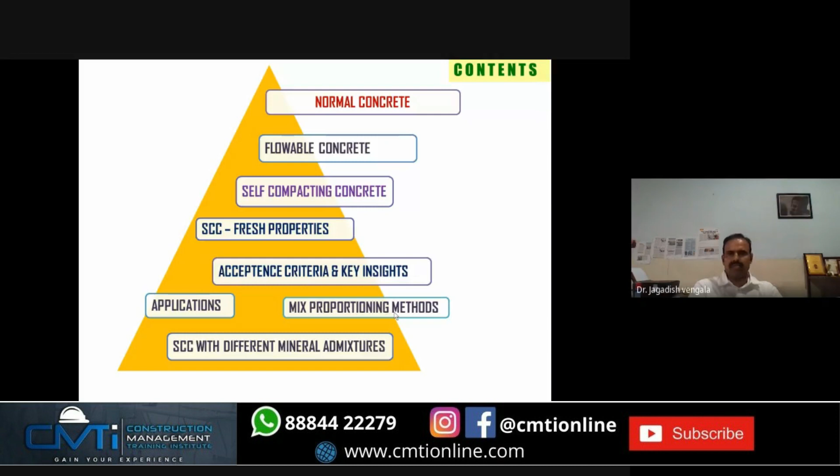My contents for this presentation are as follows. I'll give you a small brief about normal concrete, then how to achieve flowable concrete from normal, what is self-compacting concrete, the difference between flowable and self-compacting concrete, and why fresh properties of self-compacting concrete are important. I'll also cover how to accept this concrete, key insights in SCC, some applications, and one or two mix proportioning methods, along with how you can achieve it using different mineral admixtures. This is a brief content of my presentation.

Let me start my presentation with a small video which I came across near my house.

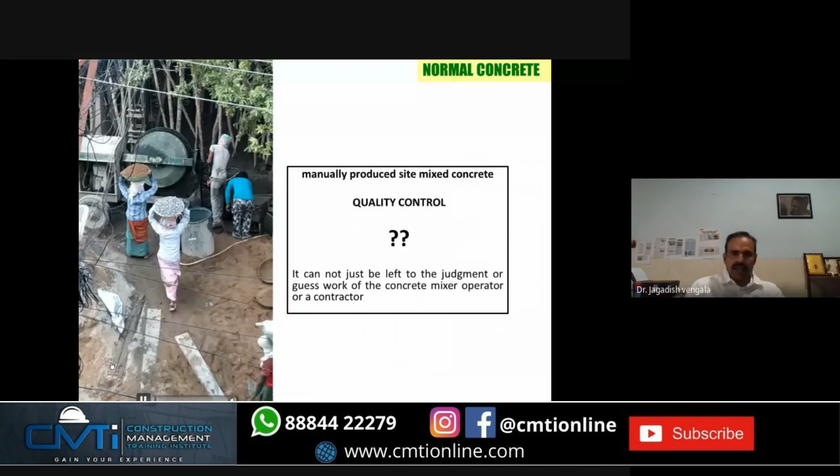This is how concrete is getting abused. Let me mute the video. So this is how the concrete is getting abused.

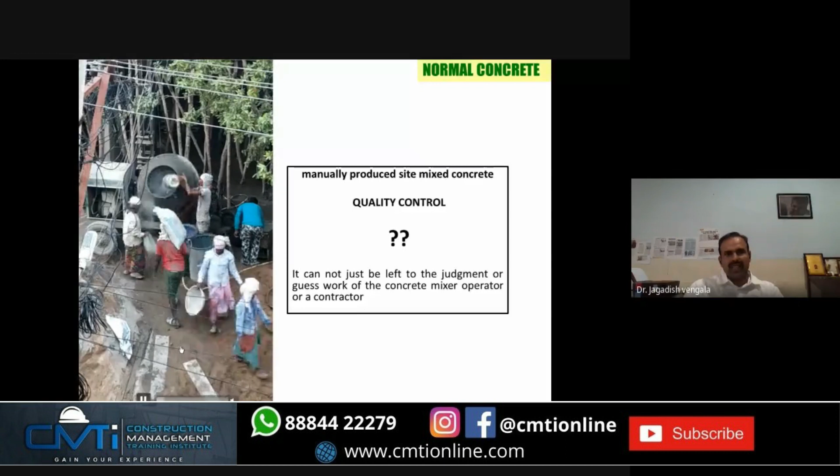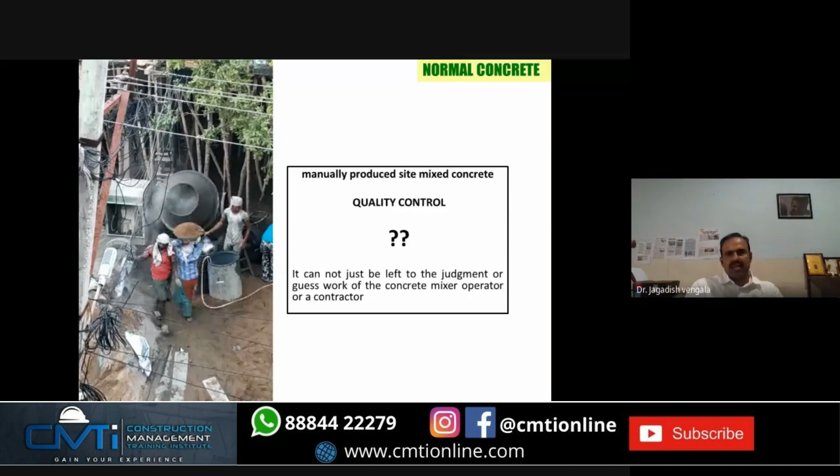This happens at most sites if you're not careful about the concrete. This is manually produced site mix concrete, and you can see there are a lot of problems.

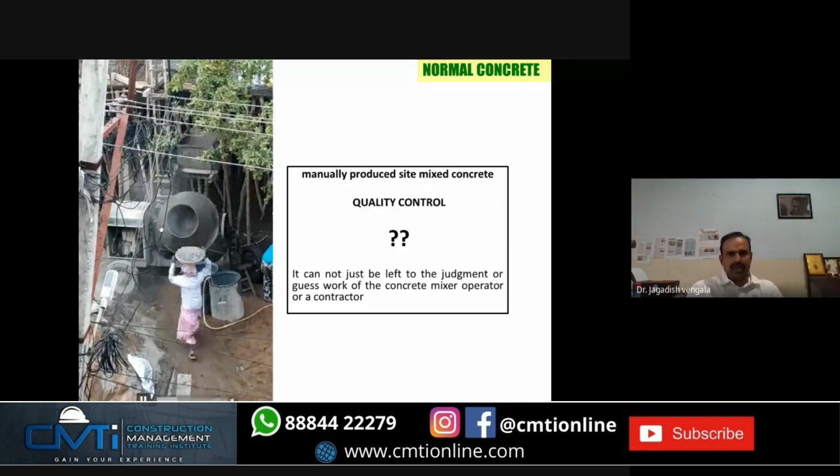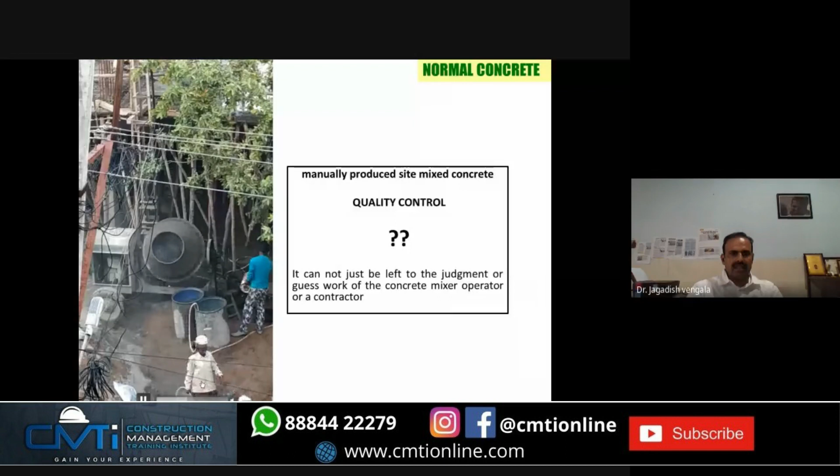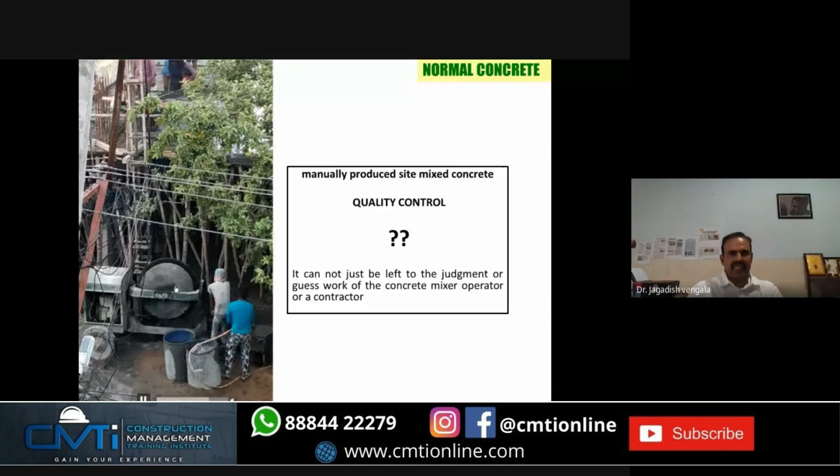What is the problem in this video? I'll explain. Here you can see the lady is putting coarse aggregate and sand, and just before dumping the concrete. Let me slide it over so you can see here - just now she has put the coarse aggregate and he has dumped the concrete. That means there was no proper mixing that happened.

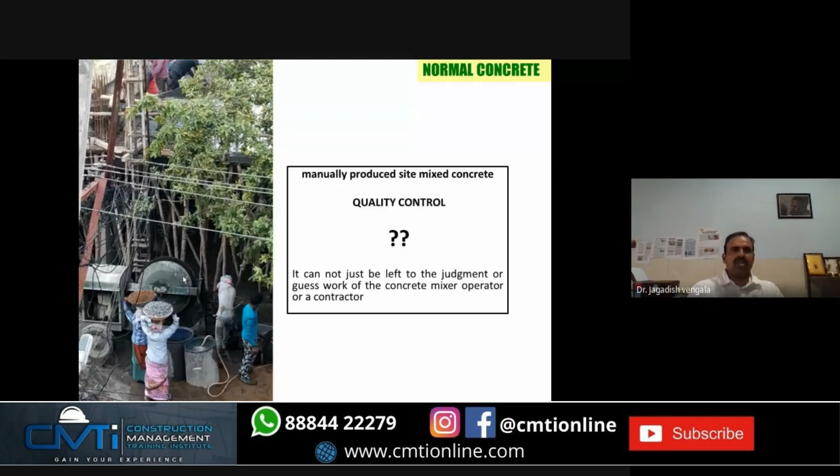So you cannot just leave this to the judgment or guesswork of an operator or contractor. This is the kind of manner in which concrete is getting used in many places, and it is very complicated to sense each and every variable - if it changes, the properties will be affected.

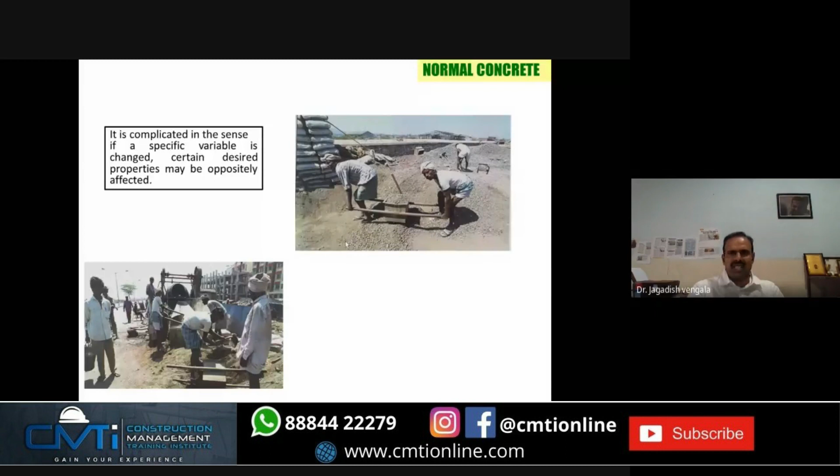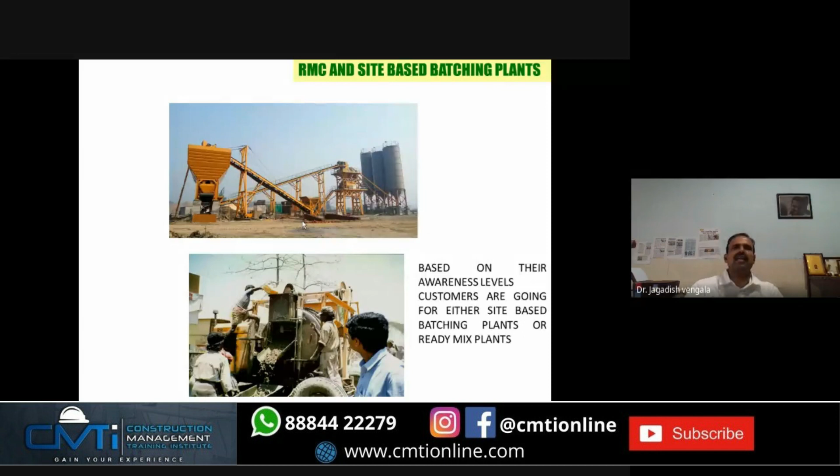On the roadside, a lot of construction happens, particularly on highways, with concrete laying and mixing. Depending on their awareness levels, customers, particularly for bigger projects, go for either site-based batching plants or ready mix plants.

This is a famous table in IS 456, which one has to know about. We'll concentrate on reinforced concrete. As per IS 456, the minimum cement content for reinforced concrete is 300 kg per cubic meter of concrete. So if you're making one cubic meter of concrete, the minimum cement content you have to maintain is 300 kg.

How do you design the mix? It is not based on grade, not based on water cement ratio, not based on cement - it is based on your exposure condition. This is very, very important. IS divides exposure conditions into 5 categories.

There is mild, moderate, severe, very severe, and extreme. Depending upon the type of exposure the structure is going to be built in, you design the concrete accordingly.

Say your structure is in a severe condition - you have to maintain a maximum water cement ratio of 0.45, minimum grade M30, and a minimum cement content of 320. So to start with, you design a mix keeping these parameters into consideration. Similarly, for extreme conditions, you have to go for M40.

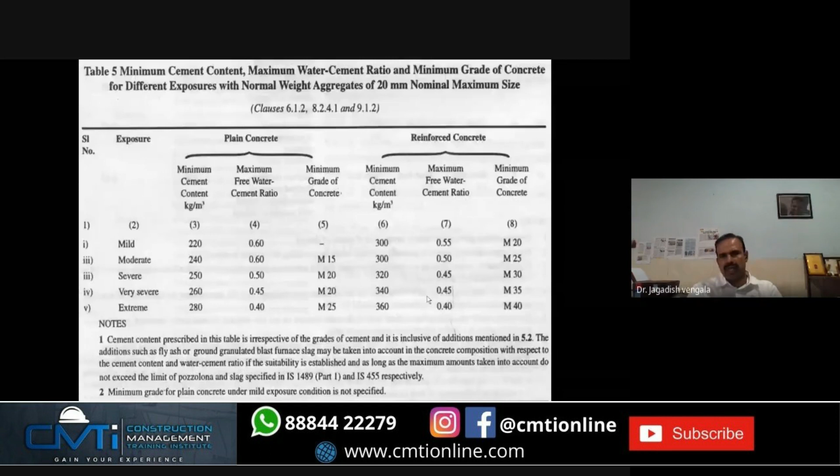IS permits a maximum cement content of 450 kg per cubic meter of concrete. Summing up, the cement used for normal concrete ranges between 300 to 450 kg. And you use a maximum of 0.55 water cement ratio, to maintain workability while minimizing voids, so you get reasonably dense concrete, with grade of concrete between M20 and M40.

IS permits the use of both mineral and chemical admixtures. The most widely used mineral admixtures are fly ash and GGBS, and for high strength concrete applications, silica fume and metakaolin, used in minimum quantities. For silica fume and metakaolin, we usually take between 5 to 15%. For fly ash, we can go up to 30-35%. For GGBS, one can even go up to 60%.

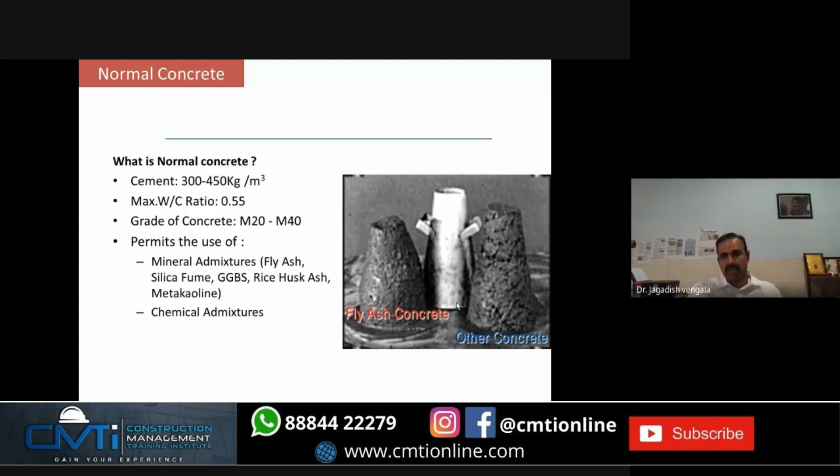Anyway, I'll show the percentages about IS permits.

So you make a normal concrete. Suppose you keep on adding more water to a particular mix, can you achieve a flowing concrete? Yes, it flows. But once you keep on adding the water, what happens? There are two problems: one is segregation, and another is bleeding, because you don't have enough finer content to hold the water. So by adding water, you may not get a flowing concrete that is also good workable concrete without segregation and bleeding.

And in the hardened state, what happens if you keep on adding the water? It leads to durability problems because the water gets evaporated and leaves air pockets, and the strength and other problems occur.

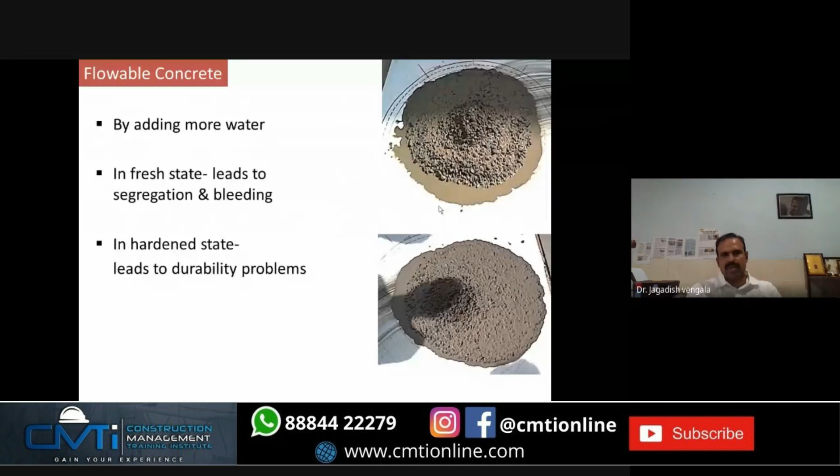So just to give you the difference between segregation and bleeding: segregation is the separating out of all the constituents in the concrete, which results in a non-uniform mix, meaning the water cannot be held by all the other constituents. Bleeding is generally a result of aggregate settlement, where the mixed cement water releases the excess water, which forms on the top or sometimes bleeds out. So these are the problems you get if you just add water to achieve flowable concrete.

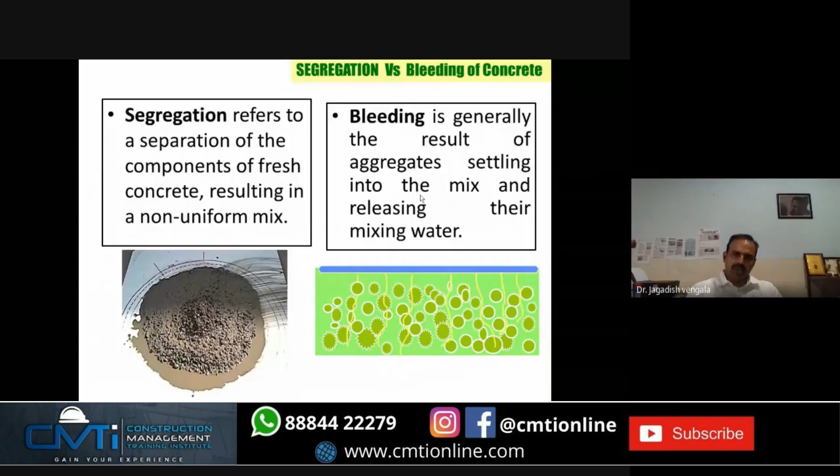But anyway, you can achieve flowing concrete by addition of chemical admixtures and by adding mineral admixtures to get a homogeneous mix. Now coming to self-compacting concrete, the difference.

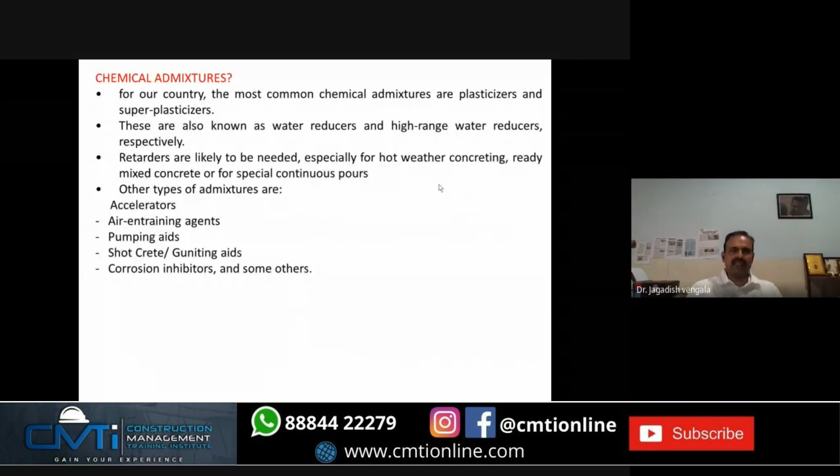Before explaining self-compacting concrete, I'll give you an overview of the importance of chemical admixtures. For our country, the most common admixtures we use are plasticizers and superplasticizers. Plasticizers are usually water reducers, and superplasticizer, the name itself, means high range water reducer. We also use retarders, accelerators, and air entraining agents, which purposefully create air bubbles inside the concrete to accommodate freeze and thaw situations. For shotcreting and guniting, you add chemicals to hold the paste onto the reinforcement. All these we call chemical admixtures - not just superplasticizers or plasticizers, but retarders, accelerators, everything comes under chemical admixtures.

I'll give you the concept of what a chemical admixture, particularly plasticizer, does. When you add water to cement, cement naturally flocculates, meaning all the particles come together and form a lump kind of thing. In these lumps or flocks, mixed water gets trapped within the flock. So if you burst the flock, what happens? The water inside will come out.

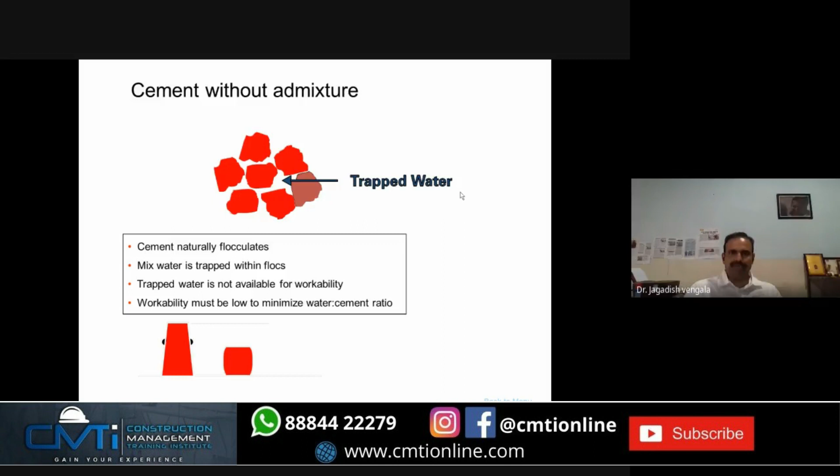This trapped water is generally not available for workability, so you have to add some kind of admixture to release this trapped water so that workability increases. By adding a plasticizing admixture to the mix, the entrapped water gets released and cement particles move freely. Workability increases, and when you have more water available for hydration, your hydration products also get improved.

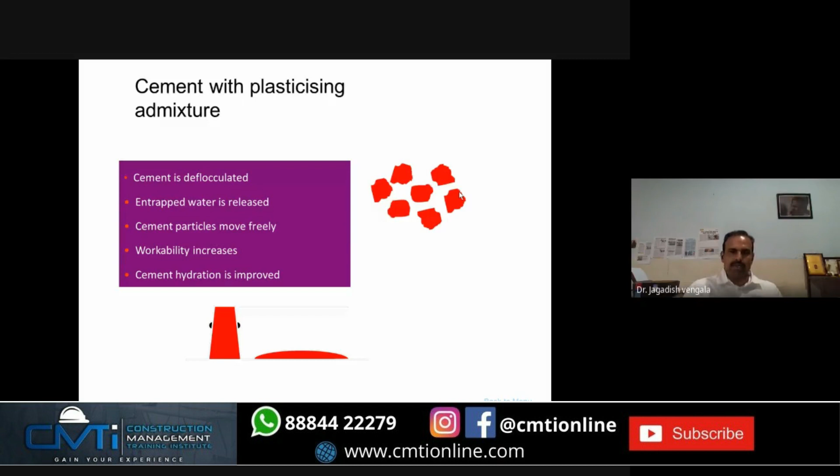This is another picture. Just to mention once again, when you add water to the mix, the cement flocks will form. When you add the chemical admixture, it releases the trapped water and it becomes more workable.

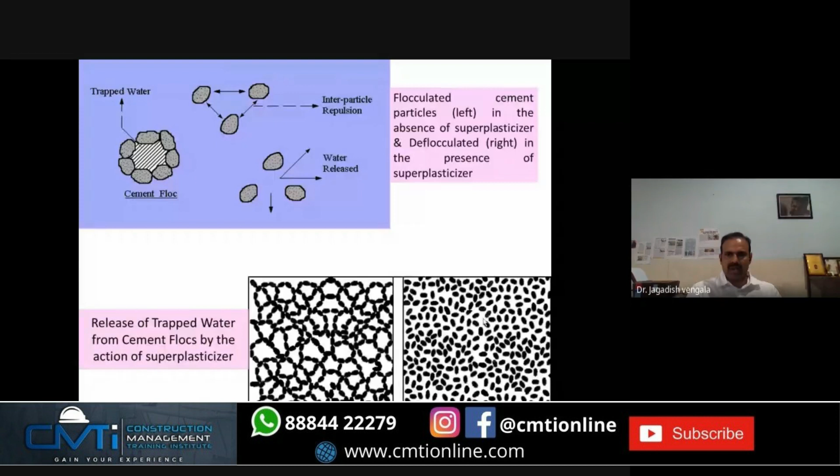So what does a normal plasticizer do? It creates different charges in the particles. When cement particles have the same charge and it releases, there is a repulsion that happens. So the chemical admixture creates an interparticle repulsion, and thus the trapped water gets released. You can see the picture on the bottom left - this is unflocculated, this is flocculated, and after adding the admixture, this is how the cement particles look. It's a microscopic representation.

What this chemical admixture does, by adding plasticizer, is achieve two things: we can increase the workability, and at the same time increase the strength. How do we do that? Let us take an example.

A mix with 0.55 water cement ratio gives a slump of 75 mm. It's a normal concrete giving a strength of 51 MPa. When you add the plasticizer, without increasing the water cement ratio, it will increase the slump while achieving the same strength - 51, 50, it doesn't make any difference. So in the first case, by adding superplasticizer, you get a more workable mix, meaning the slump is increased. In the third case, you are actually reducing the water cement ratio and adding superplasticizer while maintaining the same slump.

The first case slump and the third case slump are the same, but by adding water-reducing admixture or superplasticizer, you are reducing the water cement ratio. Thus, you get more strength. You know Abrams' law relating water to cement ratio to strength: when water cement ratio increases, strength decreases. You are reducing the water cement ratio and increasing strength by adding superplasticizer while maintaining workability.

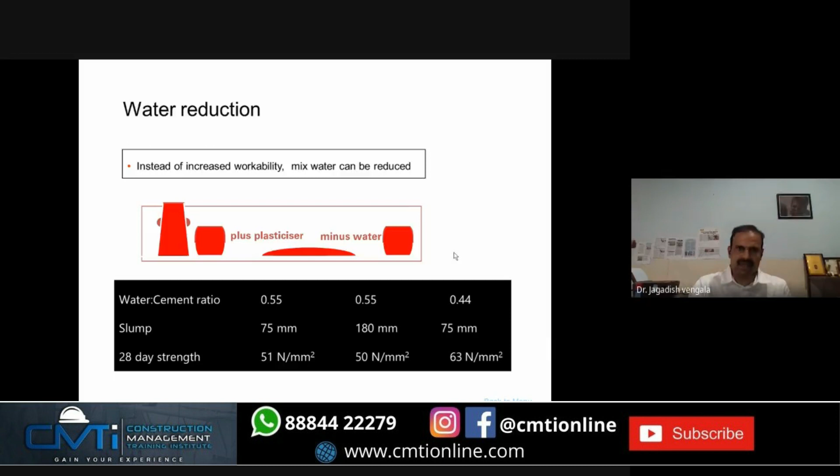So this is what a typical chemical admixture, plasticizer, or superplasticizer does. But when you look into complex structures, nowadays with mechanization, more complex structures like G plus 10, G plus 20, and 110 stories are coming up. So when designing, you have complex reinforcement. Here I would like to give you one example.

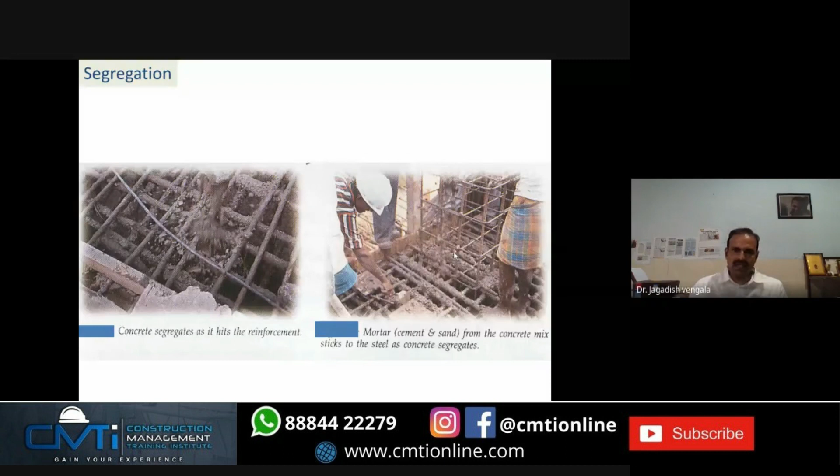You cannot place concrete from beyond a particular height. We call it 1.5 meters free fall - you cannot throw or place concrete beyond 1.5 meters height. What happens is, particularly with congested reinforcement, when you place concrete at a height, it hits the reinforcement and segregates. Mortar sticks to the reinforcement and coarse aggregate goes down if your mix is segregated or bled, if your mix is not good. These are the problems that happen particularly in complex reinforcement situations.

As I mentioned, flowable concrete - as I showed, you cannot get it by just adding water. To get a homogeneous mix, you have to incorporate more fines. Suppose if you have 100 particles and you add water, there is excess water available. If you add another 50 particles, these 50 particles will accommodate the excess water to get coated around it. So incorporating fines will reduce bleeding or segregation, and it will enhance the cohesion of the mix, and flow enhancement can happen.

But when you add excess fines, what happens? It sticks, becomes more cohesive - again the problem of placing. So you have to see what should be the workability of your particular mix.

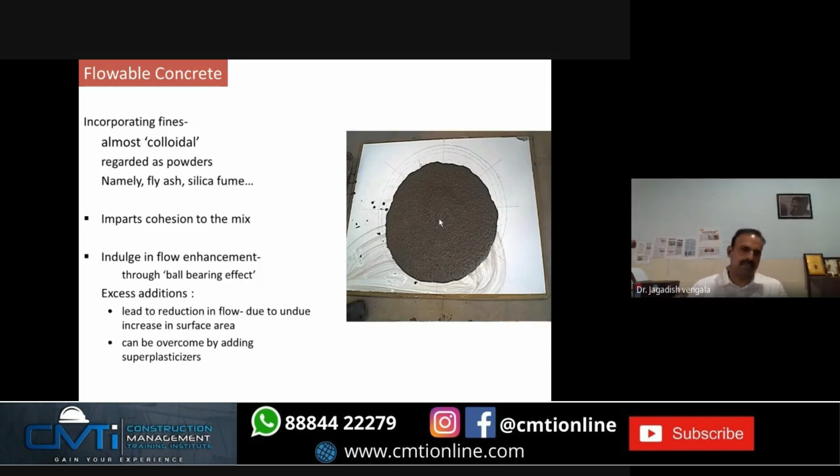As I mentioned already, RMC and concrete pumping have advanced the methods of placing concrete, but problems of compaction still remain at most sites. In the current Indian scenario, there's a lot of construction of large, complex structures, particularly in fast track mode, coming up. So congested structural reinforcement makes vibration a problem.

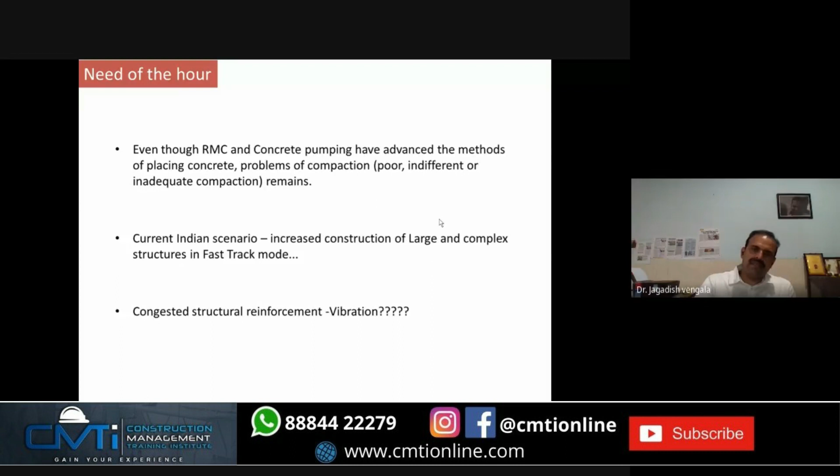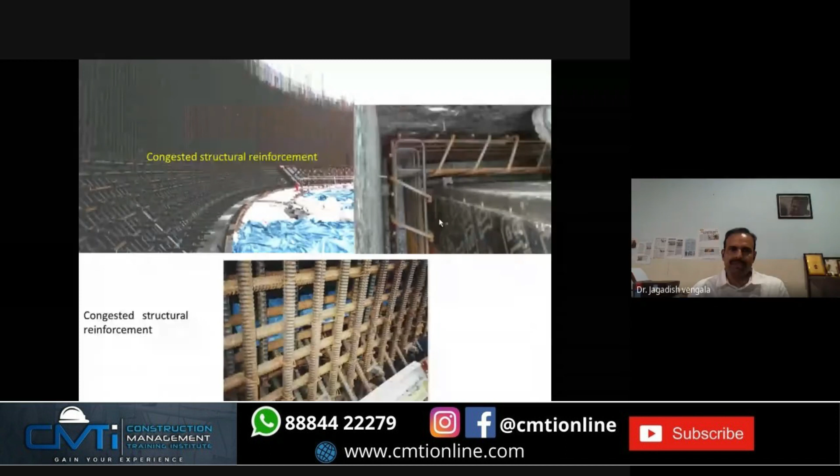But in case of congested structural reinforcement, there are a lot of problems - even though you try to vibrate it, sometimes you cannot vibrate it in such situations. So in these situations, self-compacting concrete is one such solution.

What is it? It is a highly flowable concrete. It flows, and even as it flows, it remains stable at every place. It can spread readily into nooks and corners of the formwork. You have a bigger slab with formwork - if you pour SCC from one side, it flows and reaches the other corner with the same homogeneity, same stability, and fills the formwork.

You need not do any consolidation, you don't do any vibration. At the same time, it will not undergo any kind of separation - that means when it flows, the concrete will not get separated out.

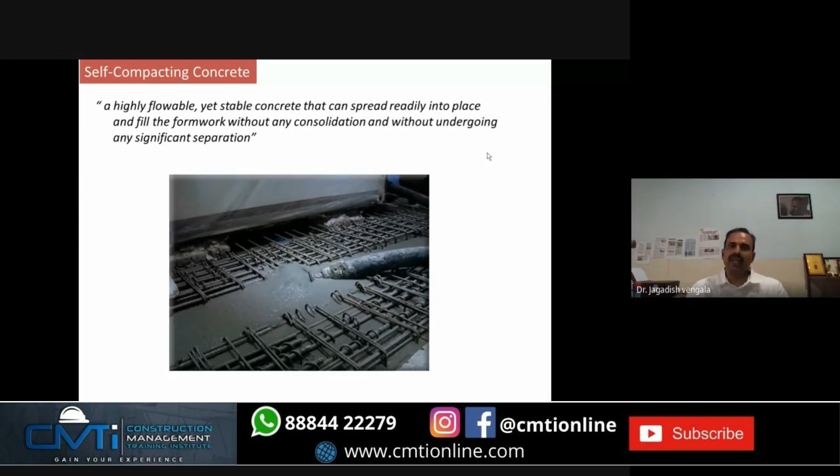What does that mean? Suppose it is flowing, there is a beam, because in this bigger slab you have beam reinforcement in between. If beam reinforcement comes in between, it has to pass through the beam reinforcement. The aggregate should not - suppose what happens if your mix is not good, all the aggregates get stopped at this reinforcement and only mortar goes to the other side. What I mean to say is, if it is good SCC, a flowable, stable concrete, it can readily place into and fill the formwork without doing any consolidation and without undergoing any significant separation.

So where did it start? Late 80s, 90s in Japanese construction and concrete industry. And the motivation behind SCC is that in the Japanese construction industry, there was a gradual reduction of skilled workers during that time.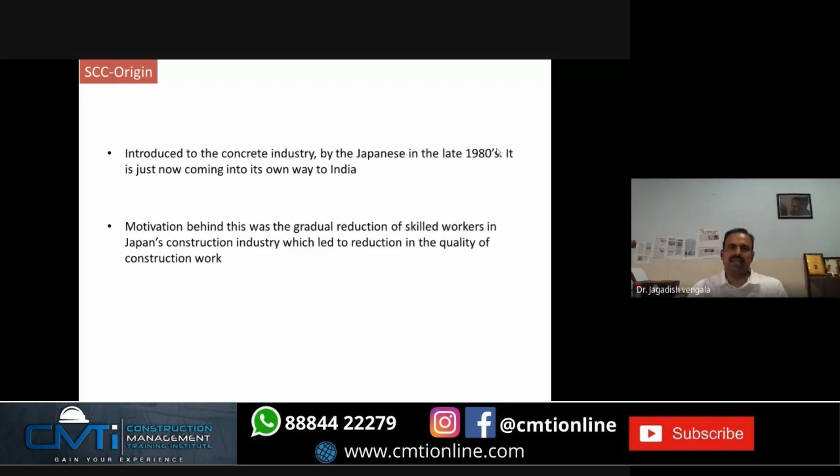Because of the reduction of skilled workers, the reduction of quality of construction took place, particularly the concrete work. This is the origin to come out with the SCC.

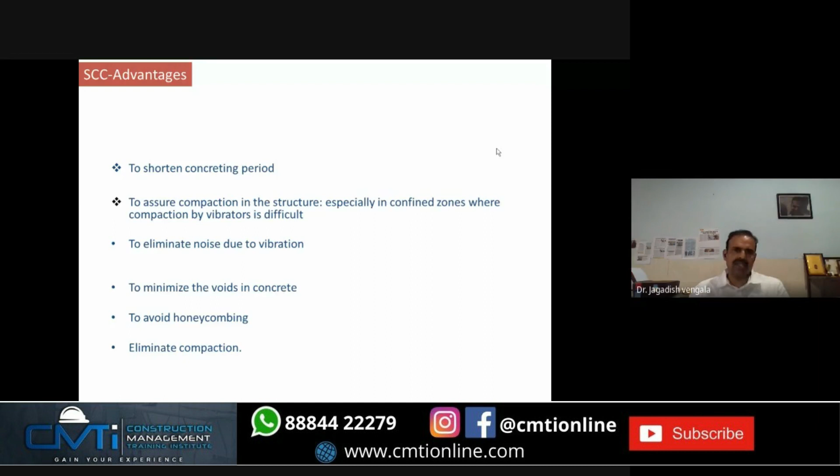There are a lot of advantages. It shortens the concreting period. It eliminates the noise due to vibration, minimizes the voids, avoids the honeycombing, and eliminates the compaction.

Let us see some of the characteristics of self-compacting concrete compared with normal concrete. In normal concrete, the cementitious content varies between 300 to 450, as we've seen in the previous slide. In case of self-compacting concrete, the minimum cementitious or powder content starts at 450 and ranges between 450 to 600 kg per cubic meter of concrete. In normal concrete, it's 300 to 450.

In case of normal concrete, if you take a typical mix, I cannot generalize because all our mixes are design mixes followed at the site. Say if you take a typical M20 grade of concrete, the coarse aggregate is approximately 1100 to 1200 depending on the mix, and fine aggregate is around 700 to 800 kgs. But in case of self-compacting concrete, you have a lower or equal coarse to fine aggregate ratio. In the last case I mentioned, 1100 plus 800, around 1900 kgs of aggregate is there in a concrete out of 2400 kg total.

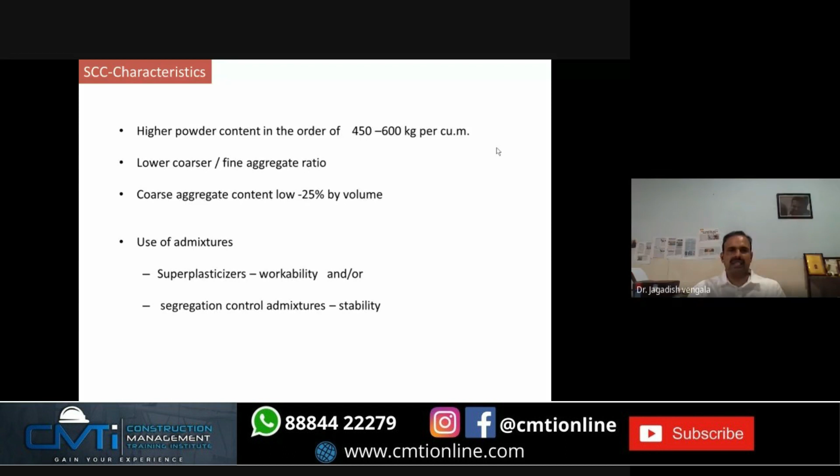In case of SCC, the ratio is equal. Out of 1900, 850 is fine aggregate, 850 is coarse aggregate, something like that. So either equal, or sometimes 700 is coarse aggregate and 750 is fine aggregate. That is how the mix becomes self-compacting, with total volume 25% by the coarse aggregate content by volume. And you have to use both stability and workability admixtures.

As I mentioned, powders are crucial. You need more powder content, more paste content in self-compacting concrete compared to normal concrete. To maintain the homogeneity, and to maintain the coarse aggregate in suspension, and to transport the coarse aggregate from one point where it's poured to the other point, it should have a rich mortar. This cohesiveness you can achieve due to large powder content, what you are adding, that means between 450 to 600 kgs.

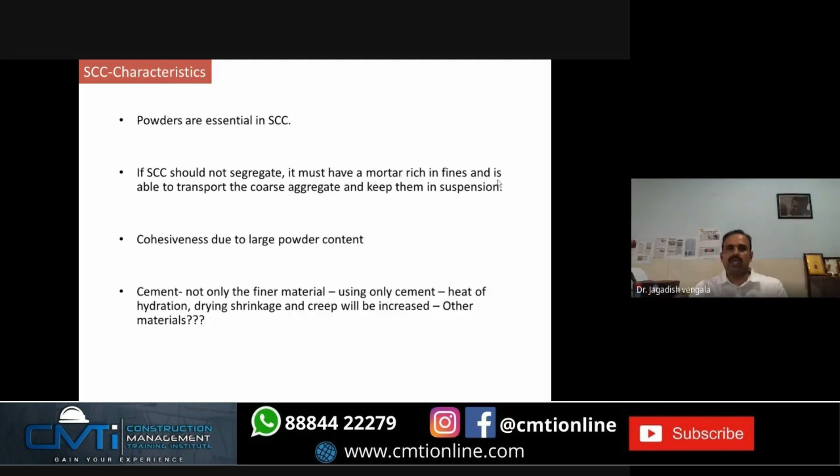When you look into IS 456, the cement restriction is 450 kg per cubic meter. If you're using only cement, you end up with heat of hydration, drying shrinkage, and other problems. So what are the various other materials? We have to look for other alternatives. Which are the other materials? These are what we call supplementary cementitious materials.

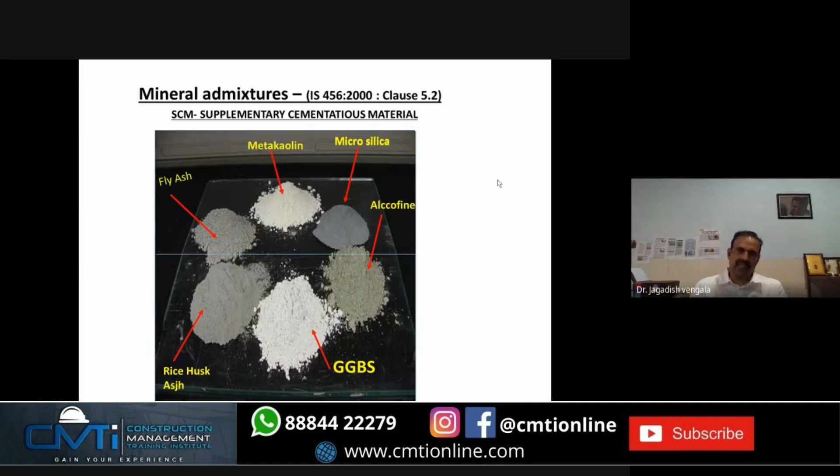So you have fly ash, majorly we are using GGBS, metakaolin, microsilica, alccofine, silica fume. IS 456 permits these as per clause 5.2. What exactly is the reaction that happens by adding these supplementary cementitious materials?

When you add water to the cement, ordinary Portland cement, we all know the hydration process happens. The final end product is what we call calcium silicate hydrates. After the reaction, slowly it happens and the CSH gels keep forming. Along with that, there is excess calcium hydroxide lime present in the mix.

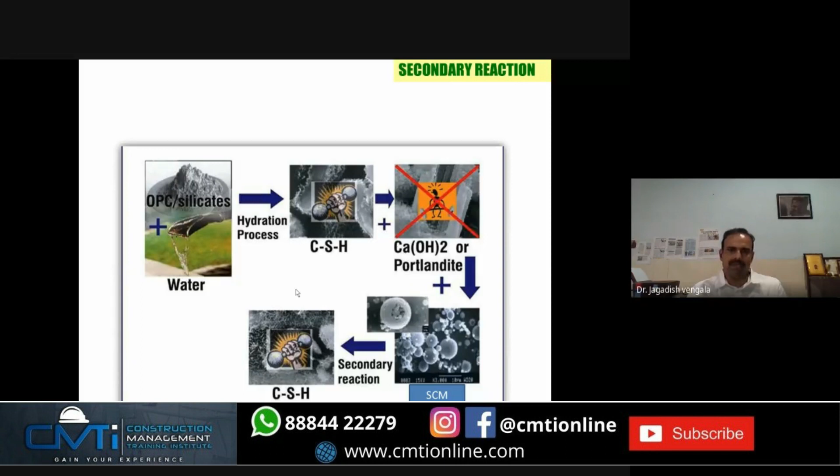When you add the supplementary cementitious material, either fly ash, GGBS, metakaolin or silica fume, these materials react with whatever excess lime is there and further react. That means what we call a secondary reaction happens and forms further calcium silicate hydrates, CSH gels, which is the main part of the concrete, which gives the strength to the concrete. So by adding supplementary cementitious materials in a mix, instead of 100 CSH gels, you get 120 CSH gels formed. That means more gels will form, so the concrete is more dense, you get more strength, more durability. Strength and durability are different, but when you have more gels forming, the concrete is more durable.

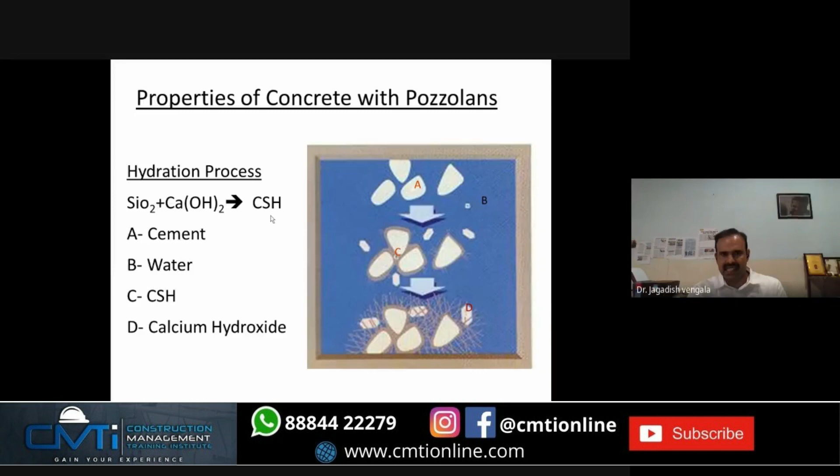Anyway, this is the hydration process - silica, calcium hydroxide, CSH gel, it forms. Also, by adding pozzolan, it will increase strength, and also increase impermeability.

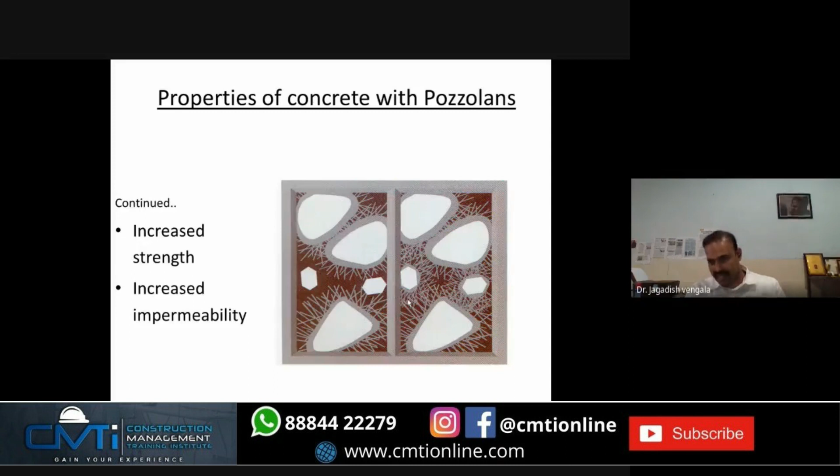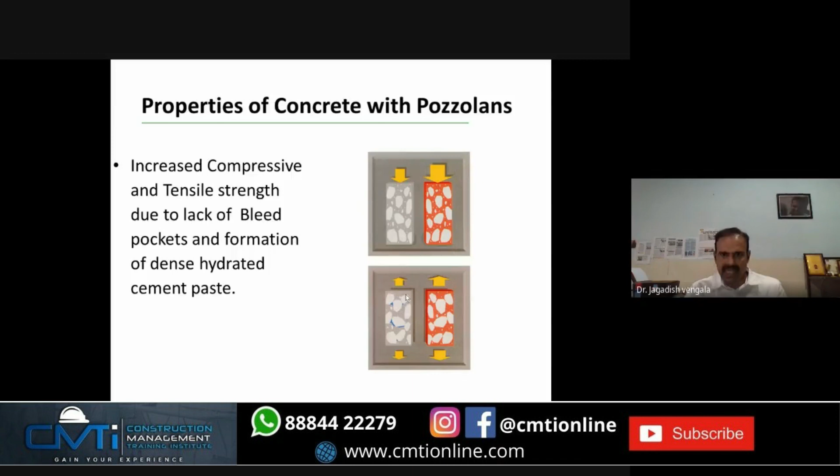In the first case and second case, you can see the pictures - the yellow color represents voids. In the second picture, which contains pozzolan, there is less void, shown in gray color. Also, by adding pozzolans, the bleed pockets get reduced and you get a dense hydrated paste, which by testing, gives increased compressive and tensile strength.

Coming to another important part of my presentation, that is fresh properties, very very important. In general normal concrete, what we do is make the mix and then place it in a slump cone, Abrams cone, lift it, check the vertical slump, or sometimes do the VB meter test, or other tests - very few tests, but the most common is the slump cone.

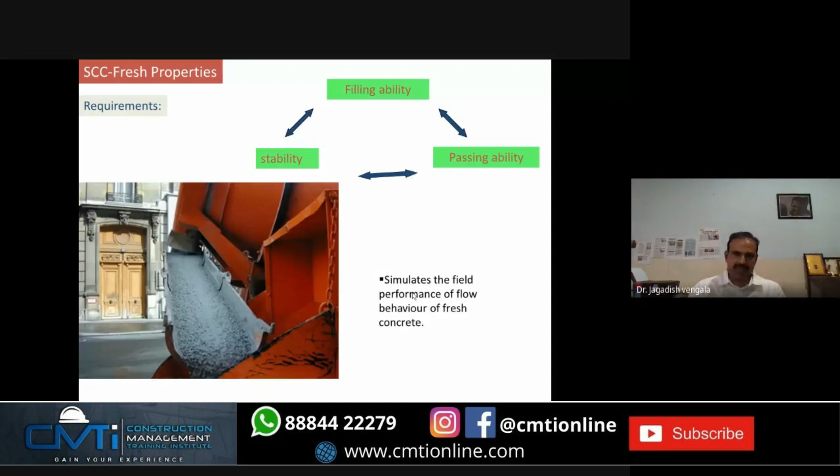In SCC, to know its stability, its filling ability, and passing ability, because you are placing it, it has to fill the formwork at the same time, it has to pass through the reinforcement at the same time, it has to have homogeneity throughout its movement. So you need to test the fresh properties thoroughly. You have to simulate the field performance. So these are the three properties you have to test.

One is the ability to flow into and fill completely all spaces within the formwork. Particularly, it has to go on its own weight, that means under gravity.

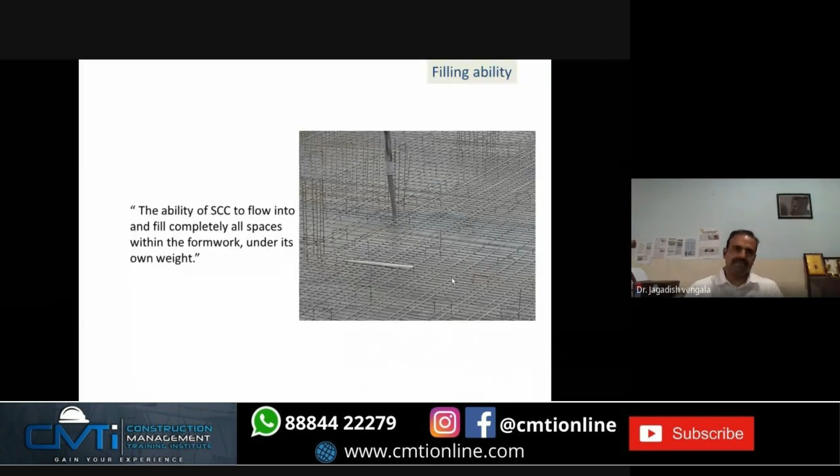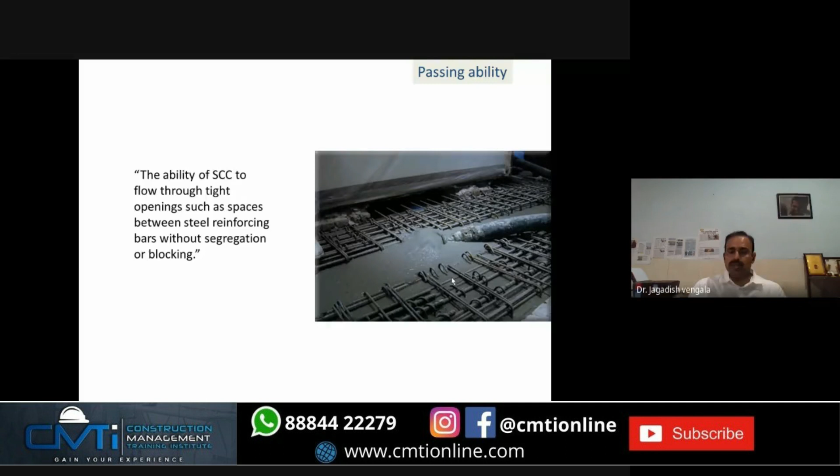Passing ability is, while passing through reinforcement between steel reinforcing bars, it should not get blocked, it should not get segregated. That is the property of SCC. And the last thing is segregation resistance. Throughout the placing and transport, it should remain homogeneous. You have to check this property also. So these are the three properties, very, very important.

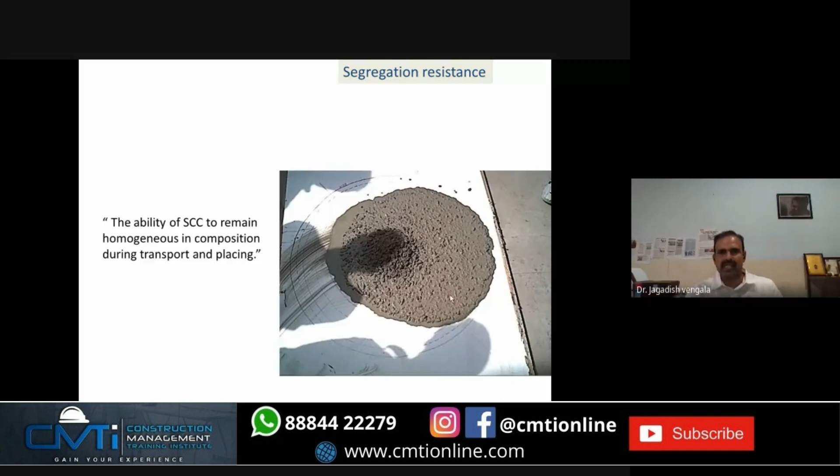Some of the test methods, so how do you check all these three properties? I'll explain you one by one quickly: slump flow, J-ring, V-funnel, L-box, U-box, fill box, and GTM screen stability test. These are the tests which will give you the properties of passing, filling, and segregation resistance.

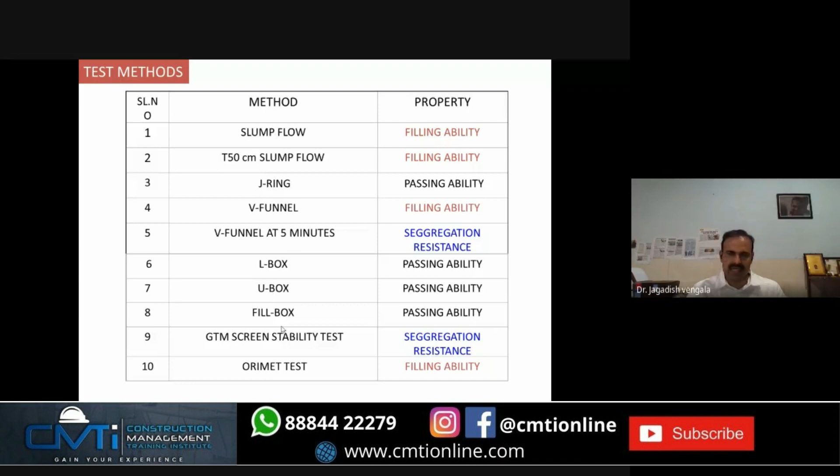Start with slump flow. We know the regular up-down cone, 300 height, 100 and 200 top and bottom diameter. It's the most popular method. We generally measure for normal concrete the vertical slump, but in case of SCC, you measure the horizontal slump, which measures the filling ability. When you place the concrete and lift the slump cone, it spreads, and you measure the horizontal flow. Generally it is between 500 to 800 mm, the recommended values.

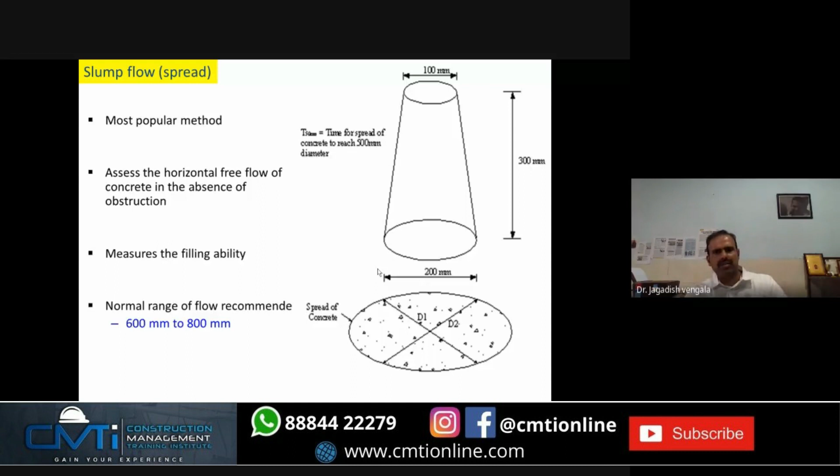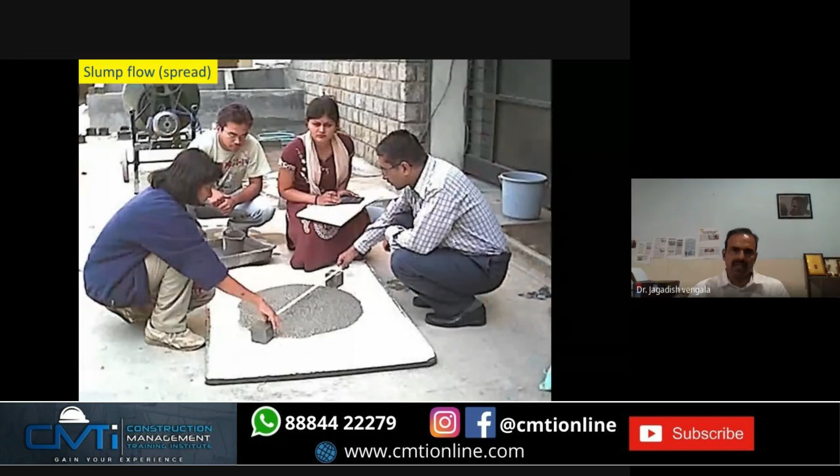This is how you pour the concrete in the slump cone, lift the cone, it spreads, and then you measure the horizontal spread. This is how you will measure it.

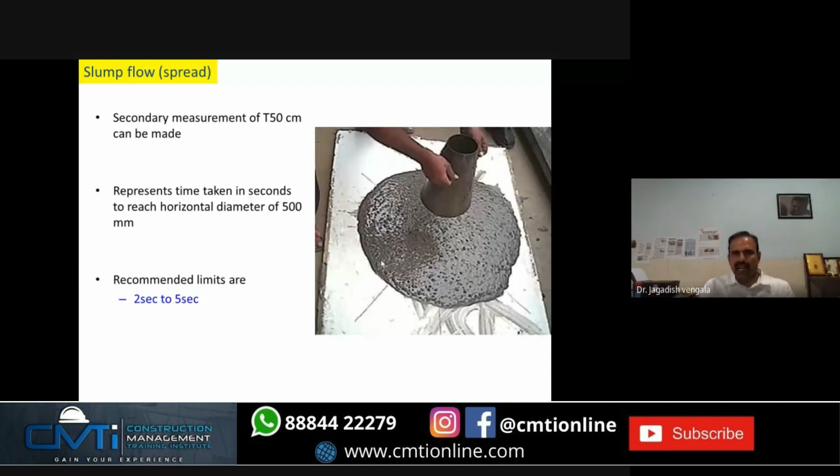And there is also one more measurement, what we call the T50 centimeter measure. What does that mean? When you place the concrete in the slump cone and lift it, the concrete will flow. The time taken to reach the 50 centimeter circle or 500 mm spread, you measure that, and it should generally be between 2 to 5 seconds.

Let us watch a video.

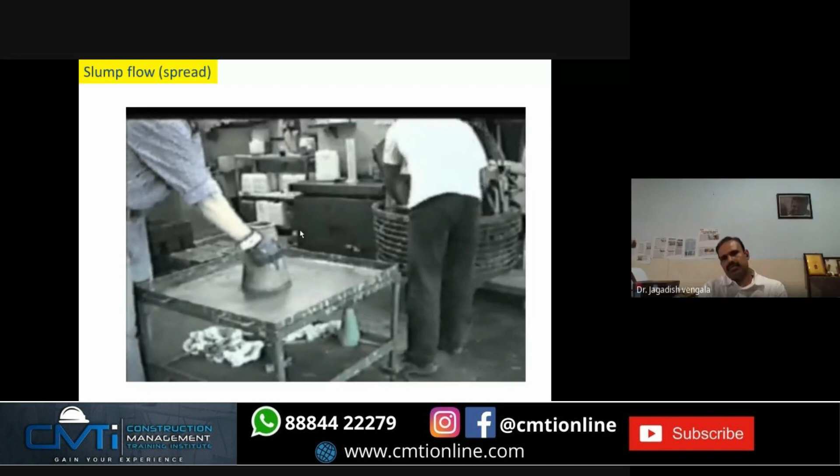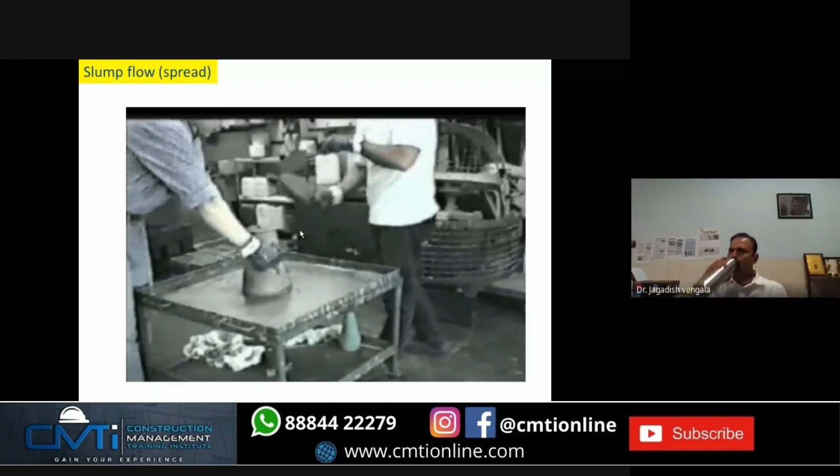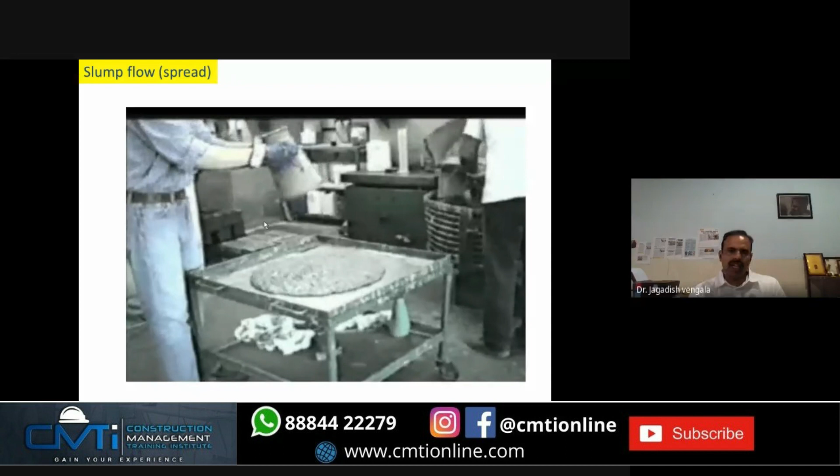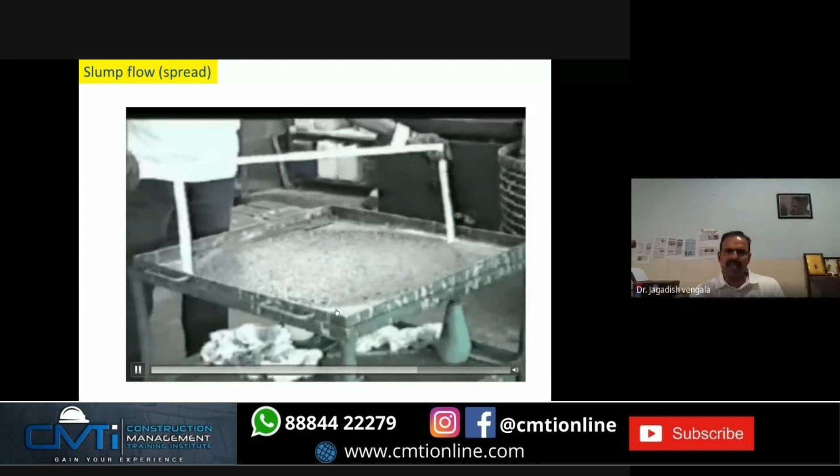So he placed the self-compacting concrete in the slump cone, cleared all that, and lifted it. Since it is not like normal concrete, it spreads. So what do you have to take? You have to take the average of two measurements in the orthogonal direction, and you take the average reading as the slump flow.

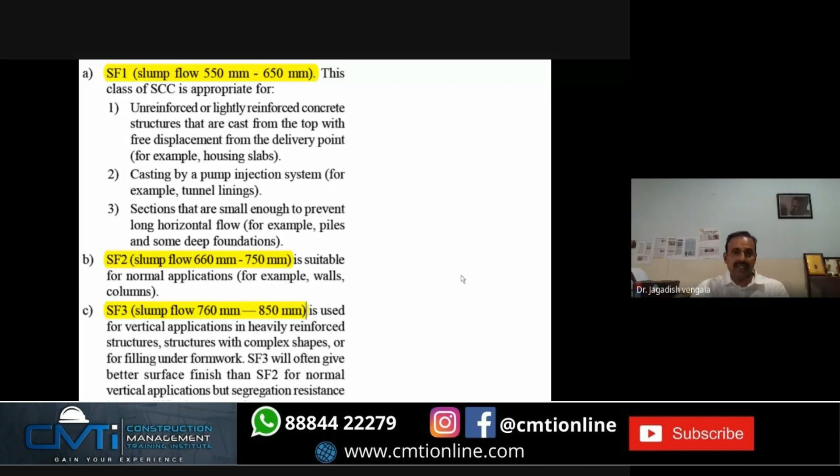Coming to the code book, if you look into the new IS 10262, there is a mention about self-compacting concrete, released in 2019. You can see the slump flow values of self-compacting concrete. The Indian Standard Code divides them into three categories: SF1, SF2, SF3. Flow between 550 to 650 is appropriate for unreinforced or lightly reinforced structures, tunnel linings and other jobs. Slump flow more like 660 to 750 is suitable for walls, columns, and other things, and 760 up to 850 for heavily reinforced structures. This is what IS mentions about slump flow.

Coming to the next test, the V-funnel test, we assess the flowability of the fresh concrete. I don't know how many of you have properly followed chemistry — when you check the viscosity of a resin or the viscosity of a flow, we flow it through a V-funnel through a small orifice. The time taken to flow through the small orifice gives you the flowability or viscosity of the resin. A similar test applies here; these are the V-funnel dimensions.

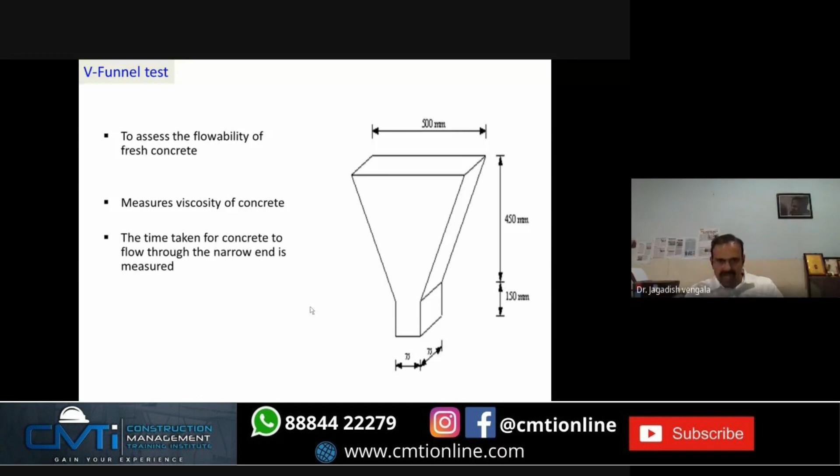The time taken for concrete to flow through this narrow end, you will measure. Recommended values are between 8 to 12 seconds.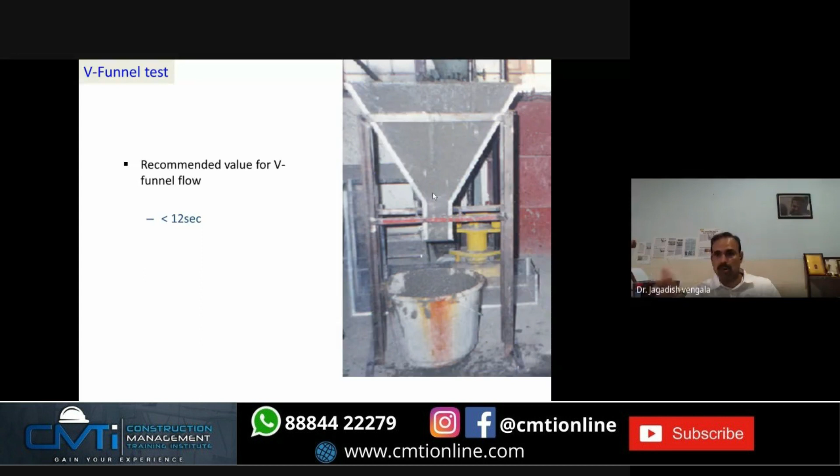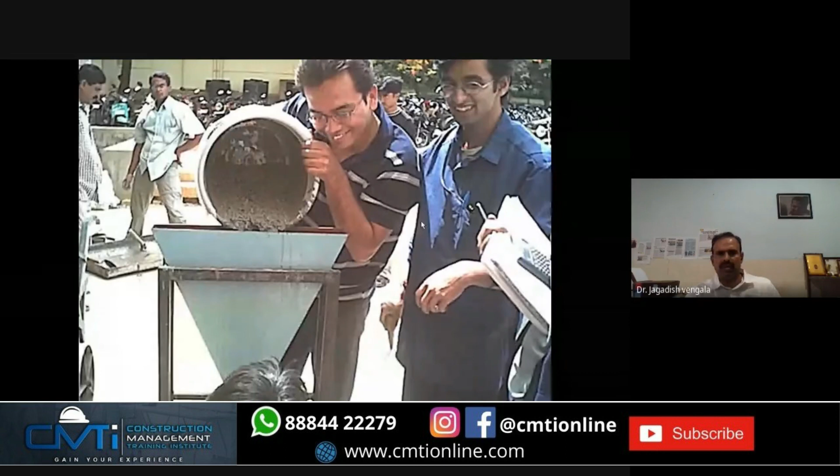This is the first V-funnel I fabricated in 2001 using perspex sheet, because I wanted to see how the concrete flows, and I could see through it. That's why I used the perspex sheets. Later, in 2002, I used this at BMS College of Engineering. So this is the V-funnel.

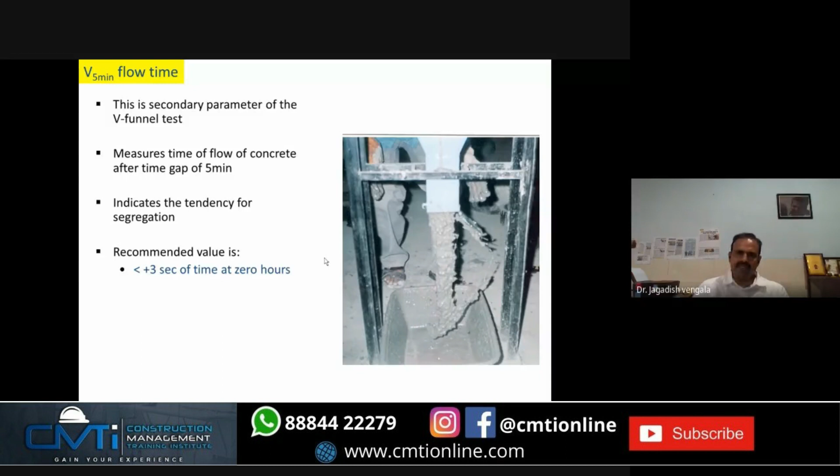Next, using the same V-funnel, we measure what we call the V-flow time after 5 minutes. What does that mean? You will place the concrete and measure the time taken to flow through the V-funnel — that is the 0 minutes reading, immediately after placing the concrete. In the second case, you place the concrete, fill the V-funnel with the concrete...